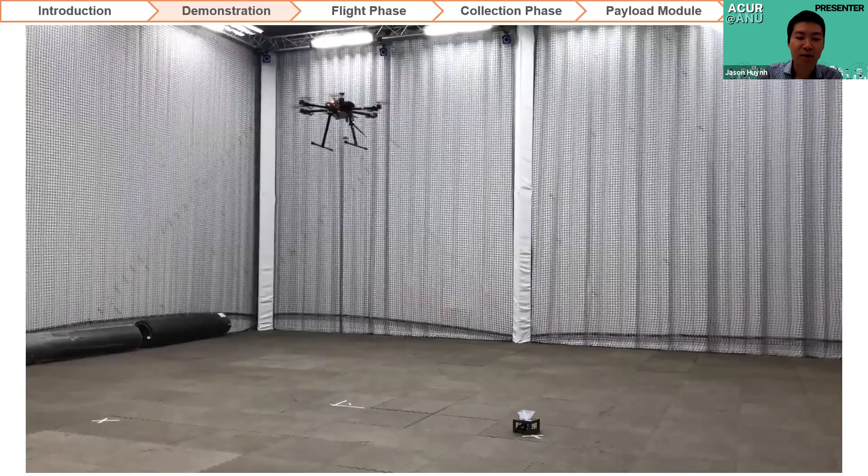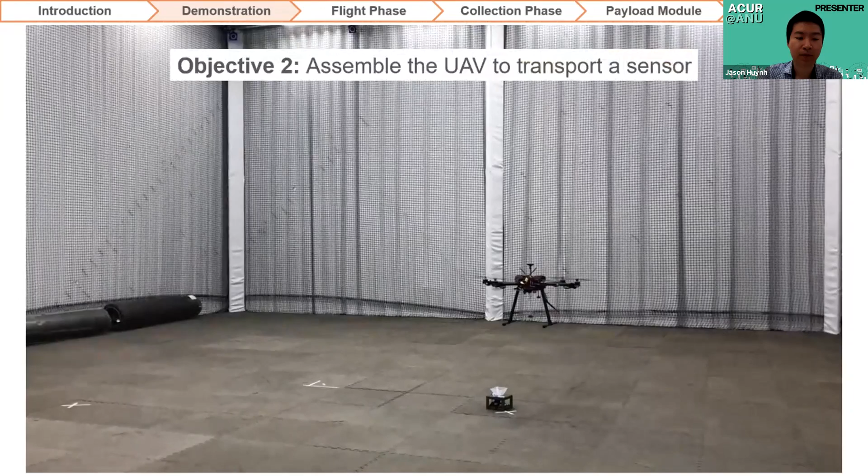To achieve our project aim, we defined 3 objectives. The first is to develop a small, low-cost sensor payload. Another objective is to assemble the UAV to transport a sensor. And the third objective is to establish real-time communications between the sensor, vehicle, and a central analysis station.

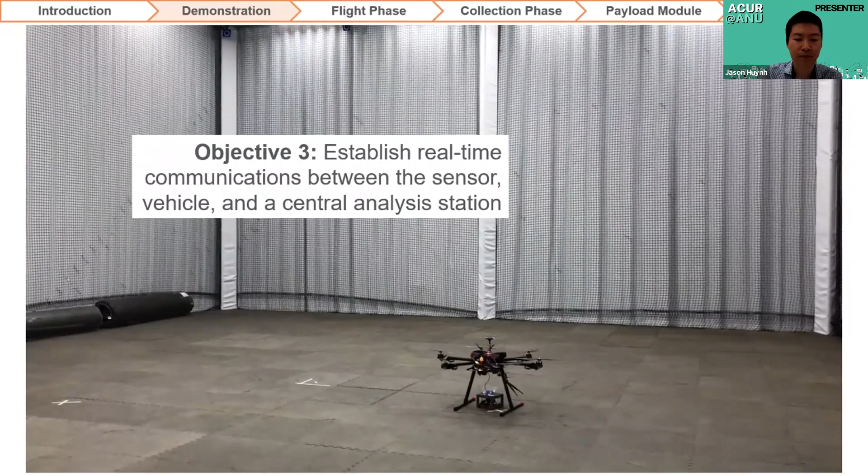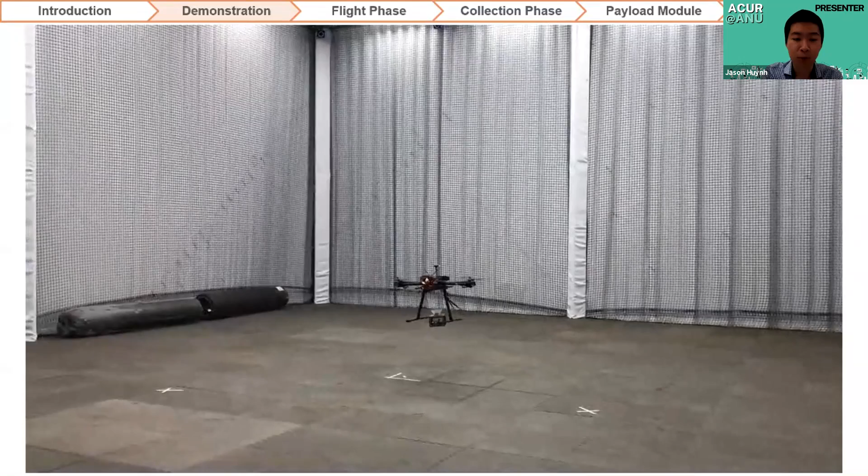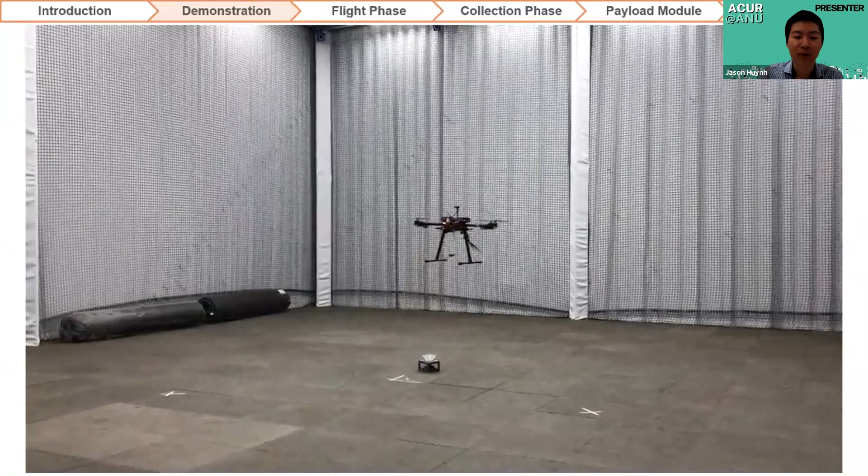In this presentation, we'll delve into the engineering detail involved in our research project. Specifically, we'll elaborate on the techniques required to complete each phase presented in this flight trial. We'll begin with the UAV flight, then the payload collection phase, and lastly, the design and communications of the payload sensor module. Patrick will now discuss the flight phase engineering.

So in preparation for the trial flight shown previously, full software simulations, as shown here, were utilised to become familiar with monitoring the UAV status - for example, warning messages or telemetry. And this was achieved using a ground control station, which is shown on the left here. And this looks the same whether it's communicating to a virtual or a real UAV.

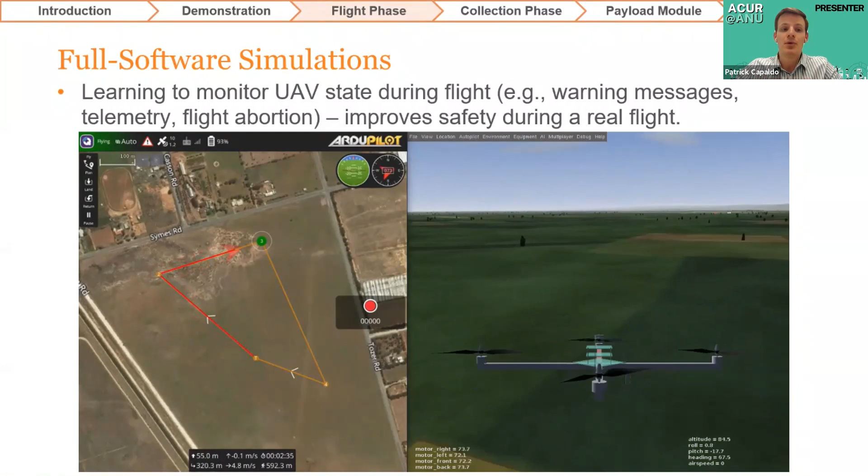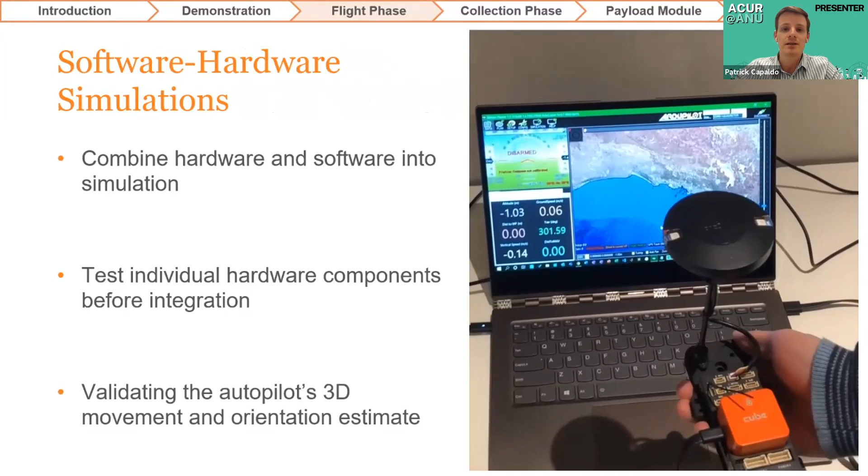So therefore, one can practice monitoring the UAV in a low-risk virtual environment before doing so in a high-risk real environment, and this ultimately improves the safety of our real test flights. As the assembly of the UAV progressed and ultimately reached completion, the performance of individual hardware components was validated by substituting them for their software counterparts and then repeating these simulations. This improves the confidence in the reliability of each physical component before they are integrated into the UAV system.

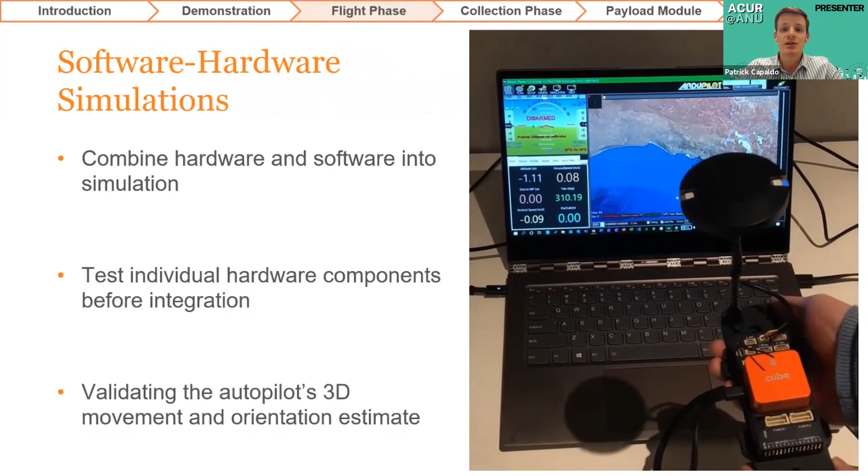So for example, in this video, the autopilot's positioning is being validated by moving the module around and checking that the telemetry responds accordingly.

A fundamental finding which forms the basis of the design of a UAV payload system is the configuration of a towed UAV system. Literature suggests that the greatest stability of the vehicle is achieved when the payload tether is attached as close to the vehicle's center of gravity as possible. Additionally, deliberate selection of an autopilot that's capable of correcting for the disturbances of a payload was required.

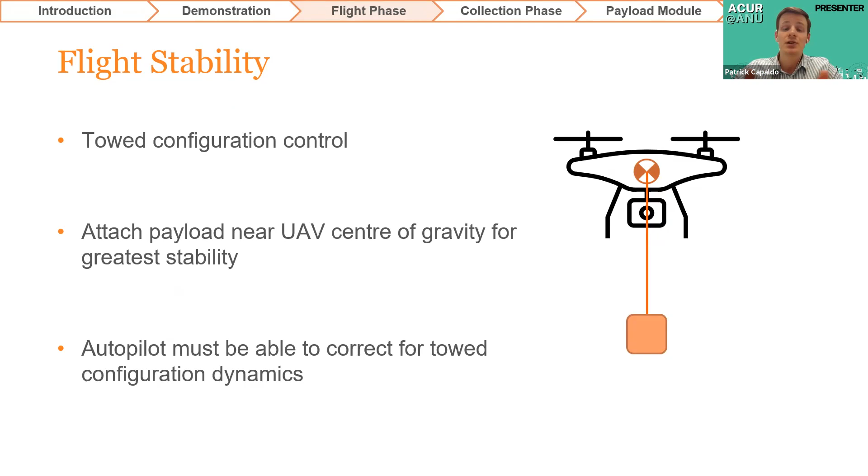A flexible tether material was chosen as it does not judder the airframe on landing, is less dependent on landing accuracy, and introduces less airframe twisting compared to a rigid connection. This lesser airframe twisting will increase flight endurance and provide faster control response.

The trade-off here being that a flexible tether has a higher chance of the payload colliding with the propellers or bumping the airframe during flight. However, sensible flight, confidence in the autopilot's correction for bumping, and the desire for a lesser dependence on high landing accuracy encouraged the selection of the flexible material over the rigid.

And so now moving on to the collection phase. To increase the autonomy of our system, we will be utilizing infrared guided landing to land above and collect the sensor payload.

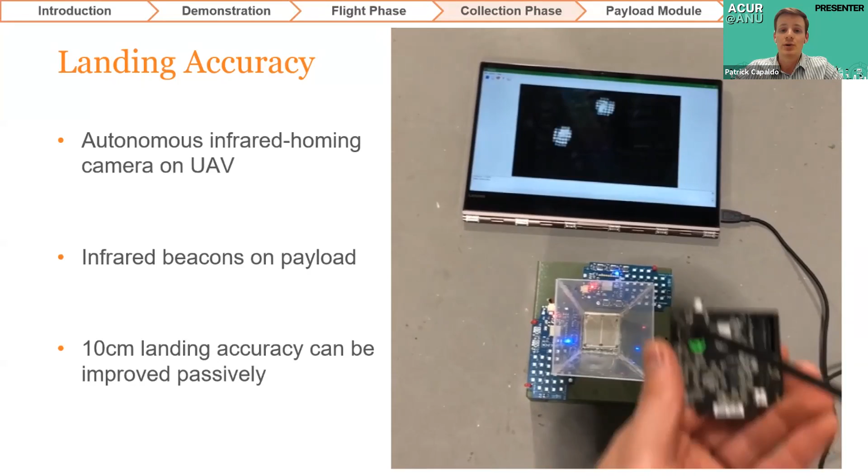The approach uses a beacon positioned on the payload, which you can see as the blue modules in the video, and an infrared homing camera on board the UAV, which I'm holding in my hand here. In this video, we can see what the camera sees.

The landing accuracy is approximately 10 centimeters. However, this is unlikely to be sufficient for payload collection purposes, and this drives the need to develop methods to compensate for this inaccuracy. Jason will now discuss a method for this compensation and the gripping mechanism.

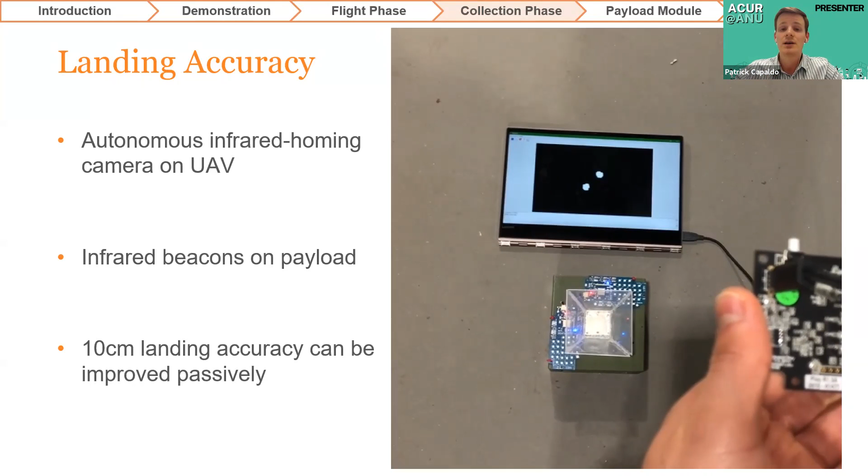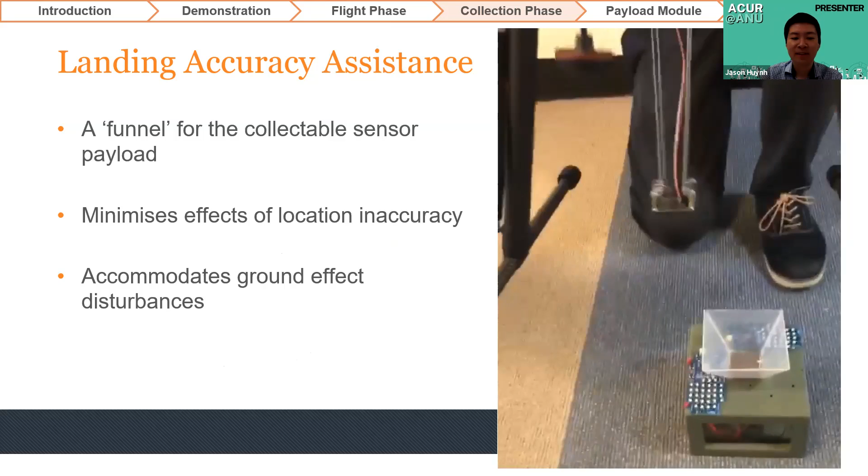One such method to compensate for the landing inaccuracy is to utilize a funnel-shaped guide above the payload. As you can see in this video, this feature allows for misaligned landings to still have complete gripper contact with the payload.

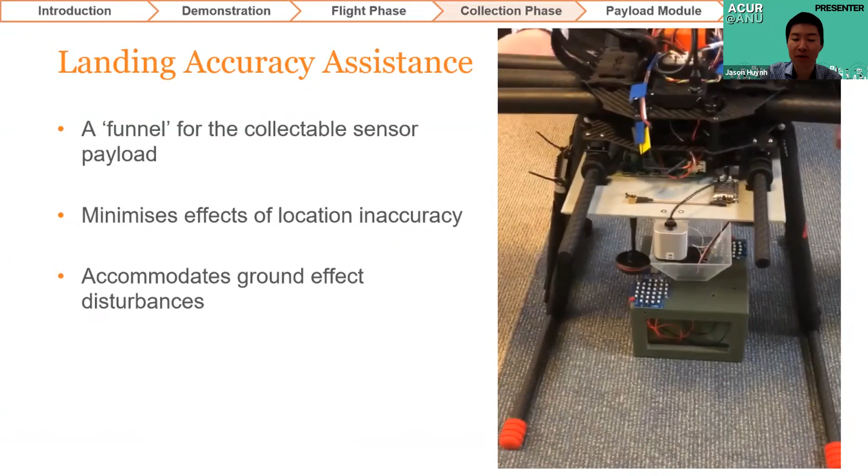Furthermore, the funnel design also accommodates the minor swaying motion experienced by the UAV due to the more turbulent air when hovering close to the ground.

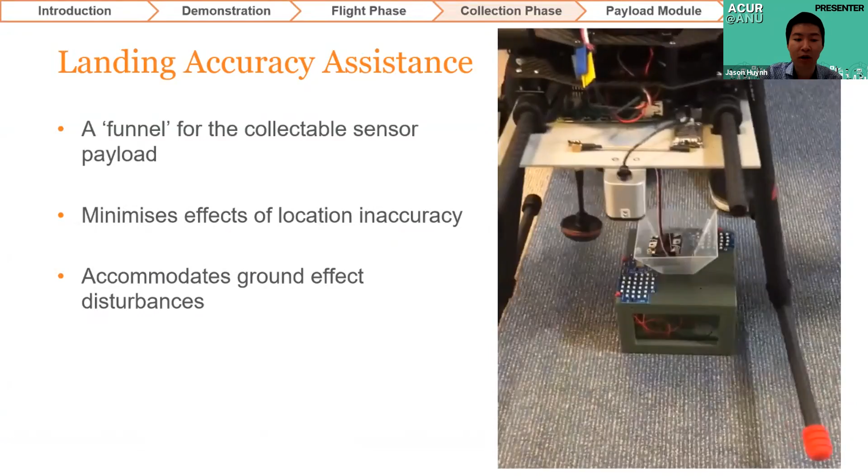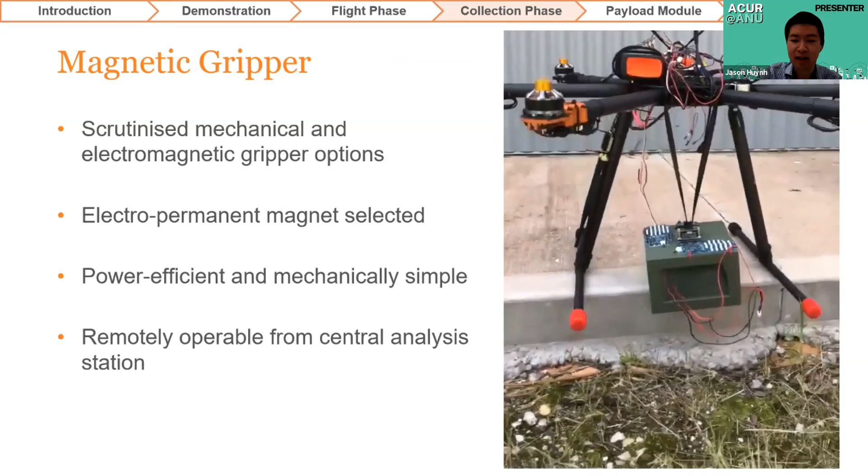In order to collect the payload, an electro-permanent magnet is utilised. This was selected as it only requires power when magnetising and demagnetizing. It has no moving parts, and it can be remotely operated away from the drone.

Moving on to the payload module, after nominating a sensor for prototyping, the communication methods and mechanical casing are designed. Initial iterations of the sensor were prototyped with two small Bluetooth-enabled Arduino computers with numerous electronic components such as resistors, diodes, and transistors, powered by a USB cord.

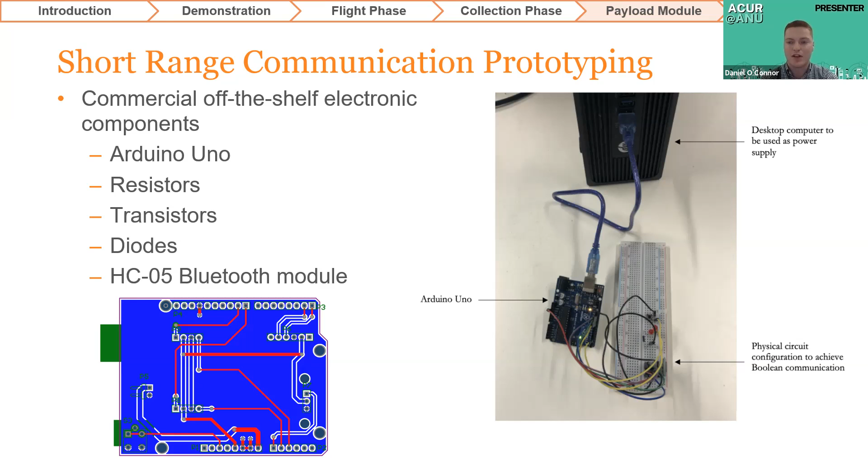To demonstrate a proof of concept in communicating information through Bluetooth, a button was utilized to send binary on and off data. As shown in this video, when the button is pressed on one device, a light appears on the other. This confirms the capability for one device to reliably communicate data to the other in real time.

The next iteration demonstrates the capability for text communication. Using the Arduino serial monitor, which allows for user input, it can be seen that the two devices can send and receive text messages between one another.

The next iteration of the payload is, as you may have guessed, the sensors themselves. By introducing 9-volt batteries as a power supply, wireless communication can be achieved, eliminating the requirement for a USB cord. Similarly, replacing the button, as seen in the previous video, inexpensive, off-the-shelf sensors may be integrated with ease into the wireless Bluetooth-enabled payload device.

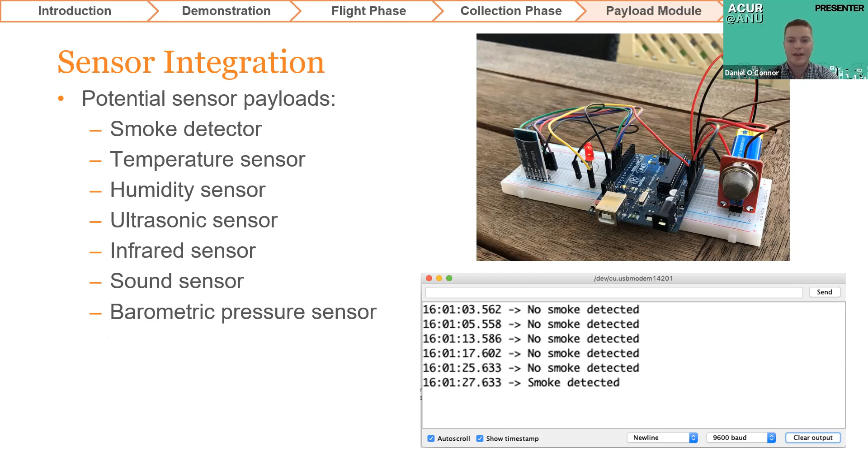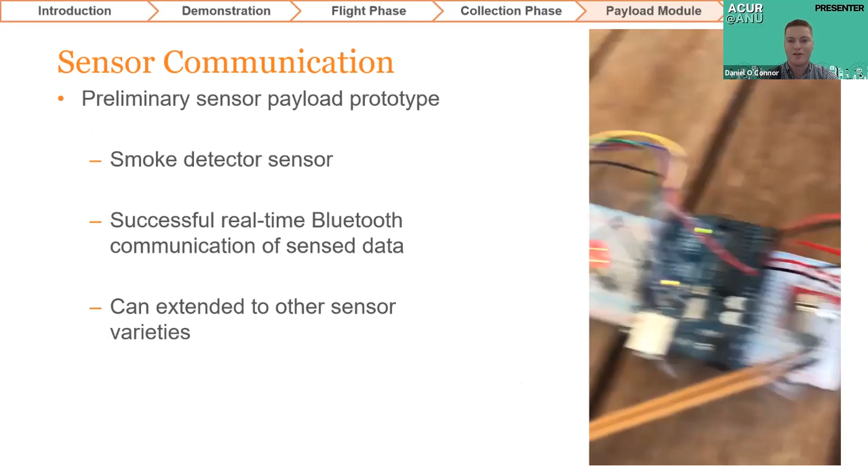As shown in this video, combining the findings from each of the previous iterations, a smoke detector sensor is seamlessly implemented into the payload device, to which when smoke is detected, a message is communicated in real time. Through integration with the Bluetooth capability of the UAV's onboard Raspberry Pi, this data may be reliably communicated to the UAV during flight.

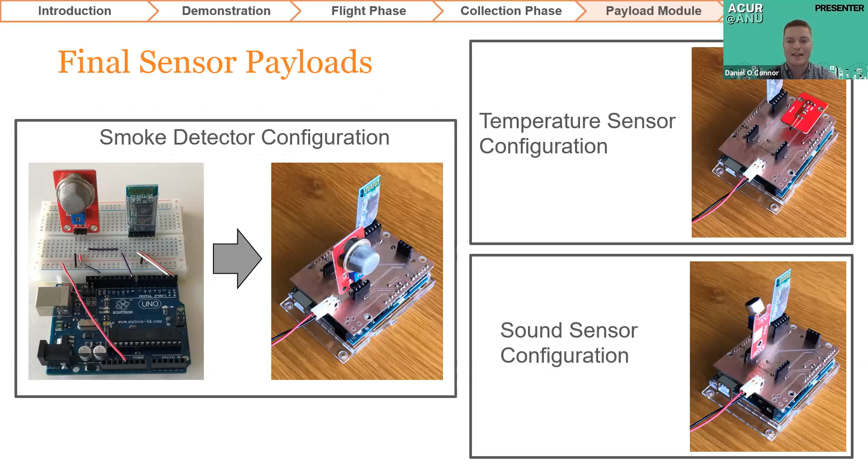Currently, 3 distinct payloads have been developed: a smoke detector, temperature sensor, and sound sensor. These devices have been refined into printed circuit boards, as shown on the right here, in order to increase durability and robustness. These sensors have each been tested both as independently operable sensors and as communicable sensors, thus they can be used both with or without the UAV present.

In order to allow the payload to be safely and securely transported by the UAV, a payload casing has been designed and manufactured. This casing is 3D printed in order to find a balance between cost, mass, and durability. It features a metallic plate and cone on top for the gripper, as Jason mentioned earlier.

Moreover, the selected casing features infrared beacons, as Patrick discussed, such that the UAV may be able to accurately detect and collect the payload. As shown here, it is evident that after the UAV detects the infrared beacons from a distance, it is able to gradually approach the payload casing.

As soon as the magnetic gripper is in close proximity to the casing, it is guided towards the plate via the cone. Then, once the gripper reaches the plate, it is activated and can ultimately transport the payload.

The progress made thus far unequivocally demonstrates the capability for a low-cost solution to problems like bushfire monitoring, but also countless other sensor-enabled problems such as medical or agricultural applications. It is clear that modular sensors integrated with a communicable UAV have strong potential to accurately and adequately monitor situations, removing involvement or danger from human operators who might otherwise be directly monitoring the situation.

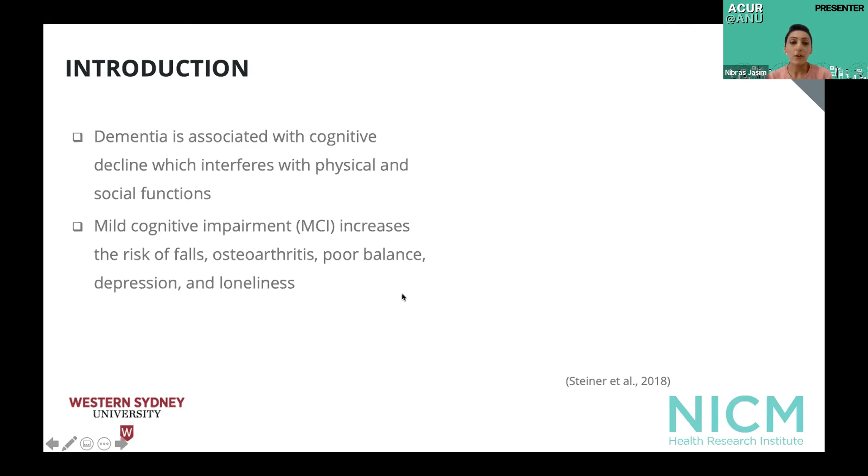There are other health problems associated with mild cognitive impairment, such as increased falls risk, osteoarthritis and pain, poor balance, depression, and loneliness. The negative effects of MCI increase with age. Approximately 20% of Australians aged 70 and older were found to have MCI, among which 50% will go on to develop dementia within a year.

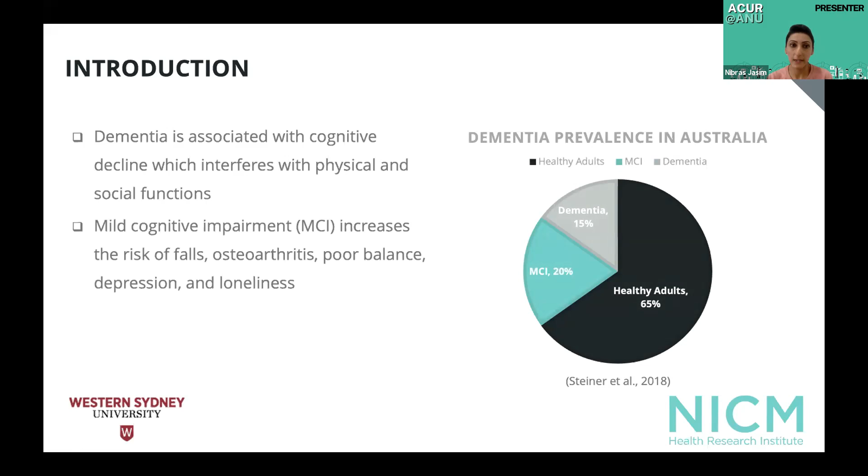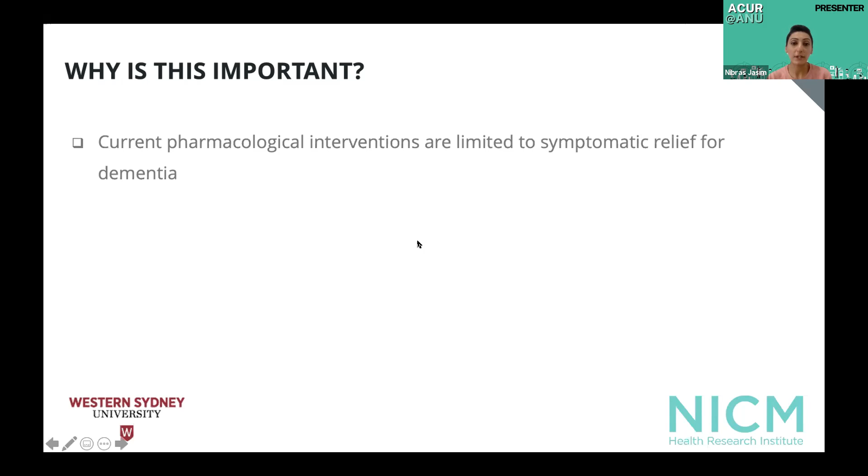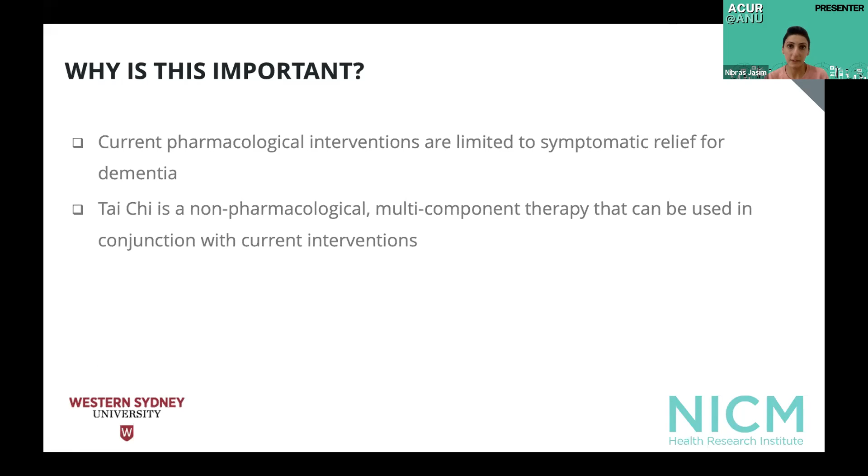So now, why is it important to do the study? Currently, the benefits of pharmacological interventions are limited to symptomatic relief for people with dementia. Therefore, non-pharmacological interventions have gained much attention for cognitive rehabilitation as a complementary therapy. Tai Chi is considered a multi-component mind-body exercise because it incorporates physical, cognitive, social, and meditative components in the same intervention.

We had two research questions. The first: what are the neurocognitive, physical, and psychological outcomes assessed in systematic reviews on Tai Chi for people with cognitive decline, including MCI and early stage dementia? The second question: does Tai Chi improve neurocognitive, physical, and psychological outcomes in this population?

Now, Darcy will talk about the method section. The synthesis process of the scoping review was guided by the Joanna Briggs Institute Manual for Evidence Synthesis, as well as the GRADE Handbook.

A number of predefined criteria had to be met by the studies for inclusion in this review. We included adults aged 50 years and older with a risk of dementia, or who were diagnosed with early stage dementia or mild cognitive impairment.

All styles and forms of Tai Chi and their training regimens were included as for the interventions, as well as all featured controls. The most recent comprehensive and high quality systematic reviews with meta-analysis of randomized control trials and/or non-randomized studies for interventions were selected.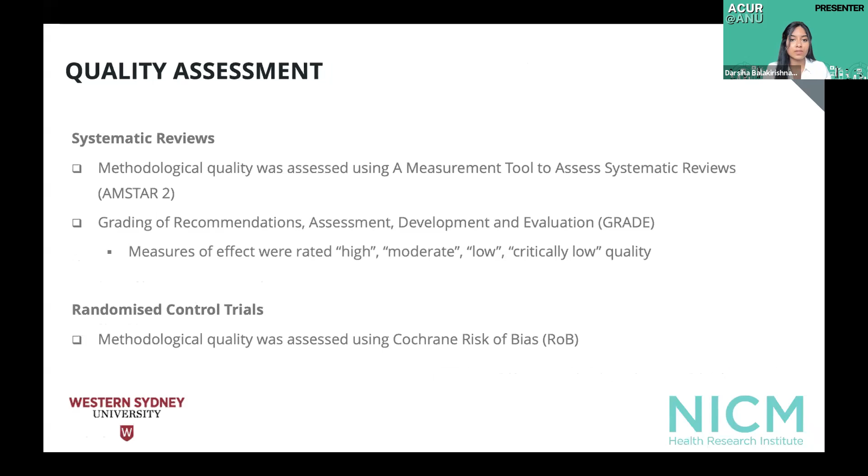Further quality assessment was done on the systematic reviews using GRADE to evaluate their certainty and their reported measures of effect, which was characterized as high, moderate, low, and critically low qualities. Now I'll pass it on to Nibras to talk about our results.

569 studies were identified, among which 14 studies were included, including 8 systematic reviews with meta-analyses and 6 randomized controlled trials. The diagnosis of the participants included early-stage dementia and specifically mild cognitive impairment. Participants were aged between 55 and 85 years old.

Tai Chi was included as part of an array of mind-body interventions or exclusively as an intervention for the experimental group. The control interventions included stretching and relaxation exercise, no intervention, health education, handicraft, usual lifestyle, or memory training.

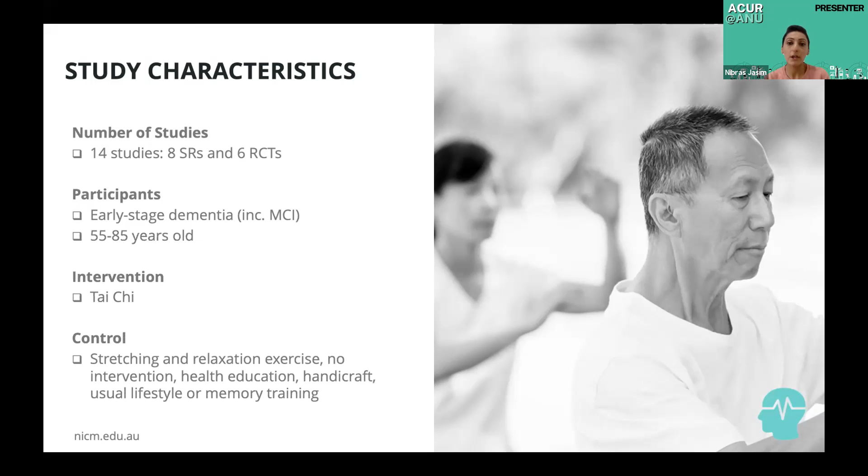Now we go to the effects of Tai Chi and the evidence from the meta-analysis. We identified neurocognitive and psychological outcomes. The neurocognitive included global cognition that was found in 4 systematic reviews and assessed by 6 scales. 4 of those 6 scales were significantly better than the control group. 2 of them weren't significant, and their grade certainty ranged from moderate to very low.

The attention and executive function found in 3 systematic reviews assessed by 5 measurements. 1 of them was significant and 4 weren't significant, and the grade certainty ranged from moderate to low.

The memory found in 3 systematic reviews and assessed by 3 measurements. 2 of those were significantly better than the control group, and 1 of them wasn't significant. Their certainty ranged from low to very low. Language and perceptual motor function was found in 1 systematic review and was measured by 2 scales.

One of them was significant, one wasn't significant, and both were of moderate certainty. For the psychological outcomes, we found depressive symptoms measured in one systematic review by one scale, and it wasn't significantly better than the control group, also of moderate certainty.

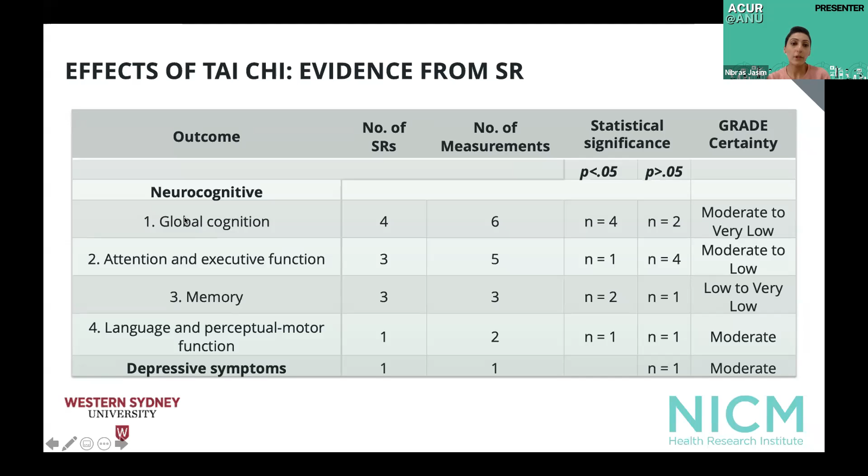Now we go to the effects of Tai Chi and the evidence from the RCTs. We found neurocognitive outcomes, psychological outcomes, and physical outcomes. The neurocognitive outcomes included global cognitive function, found in 3 RCTs measured by 5 different scales. One was significantly better than the control group, and 4 weren't. Memory was found in 1 RCT measured by 1 scale, and it was significantly better than the control group.

For the physical outcomes, pain was found in 2 RCTs measured by 3 different scales. One was significantly better than the control group, and 2 weren't. Balance was found in 4 RCTs measured by 8 different scales. 6 were significantly better than the control group, and 2 weren't significant. Psychological outcomes were measured by 1 RCT and 1 scale, and it was significantly better than the control group.

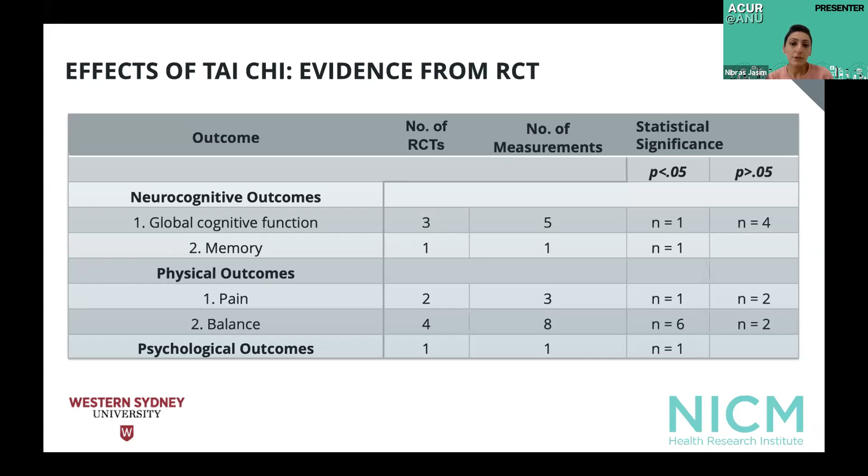Now we return to Darsha to talk about the discussion section.

To the best of our knowledge, this scoping review is the first to comprehensively evaluate systematic reviews, meta-analyses, and RCTs on the effects of Tai Chi on various outcomes in individuals with early stage dementia. Overall, this review found that Tai Chi had a mixed effect on neurocognitive, physical, and psychological outcomes amongst people with early stage dementia, and we found differences between groups were inconsistent.

These discrepancies in results may come down to variations in control groups. For example, one meta-analysis had singing as a control group, and another had playing cards. There were also variations in the target populations that have to be taken into account, ranging from only MCI to some studies having a combination of MCI, dementia, and cognitive impairment. Another potential reason for this inconsistency could be the varying nature of the tools or measurements used to evaluate the outcomes. For example, for global cognition, numerous scales were used across the studies, including MMSE, ADAS-COG, and MOCA. All these variations could have contributed to the mixed effects we saw in the results.

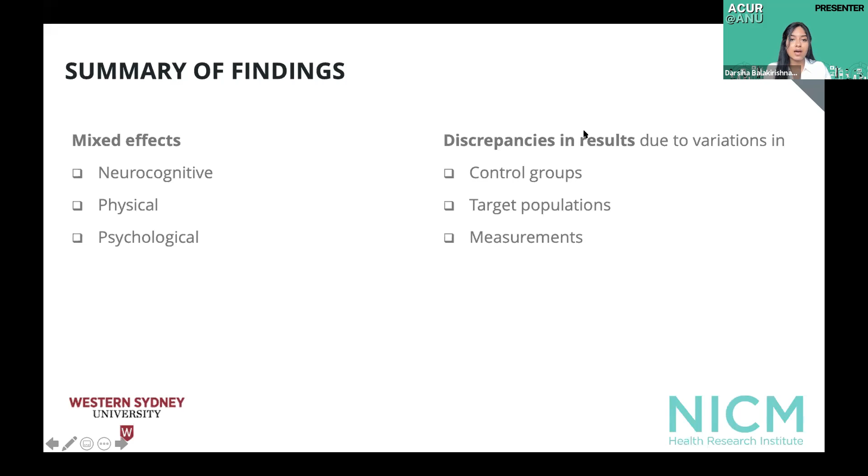So the big question is, where do we go from here? To address the gap in the current literature, we recommend that future studies need to investigate the effect of Tai Chi exclusively on people with early stage dementia and MCI, because we found not many studies targeted that population. Additionally, since the included studies in our review did have low quality, we suggest future researchers analyze high quality RCTs to increase the certainty of their conclusions.

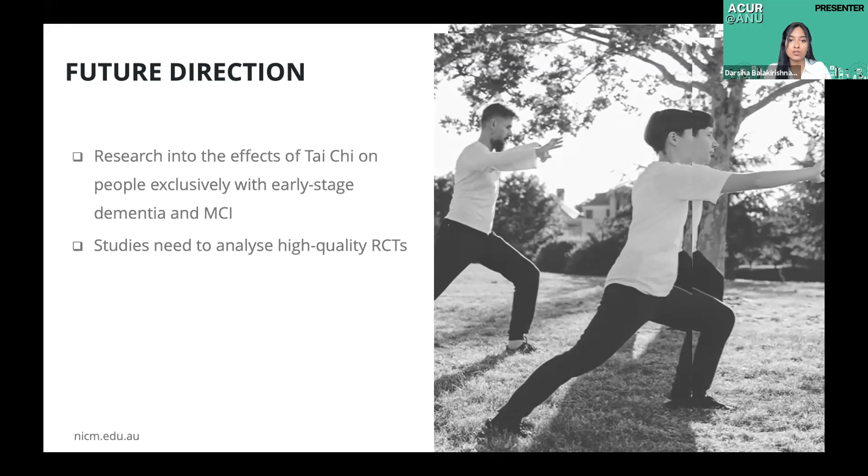While we don't have strong evidence for the benefits of Tai Chi as of yet, it is still considered a safe and healthy form of exercise that all participants can practice. Ultimately, we hope our work paves the way for Tai Chi to one day be recommended by health professionals as a complementary treatment for early stage dementia.